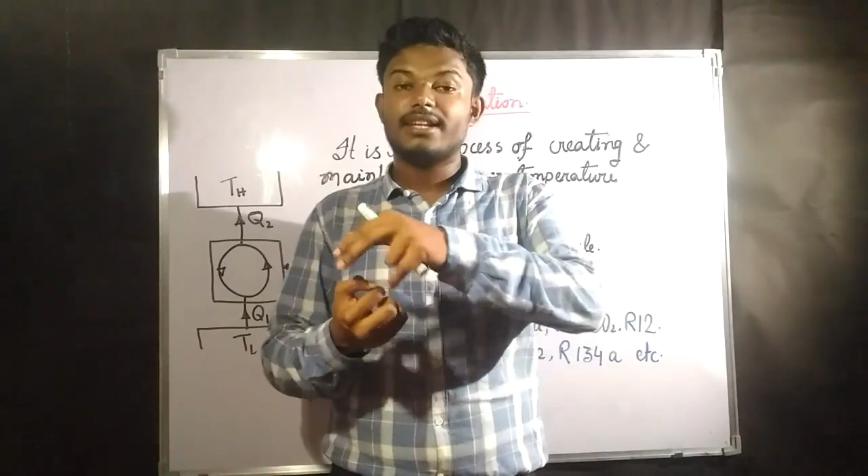Now what is refrigeration? Refrigeration is nothing but the process of creating a temperature which is lower than the surrounding temperature, and to maintain that temperature. This is known as refrigeration, or the process of refrigeration.

So if you imagine the refrigerator present in your room, the space covered by the refrigerator, if you open the door, you can feel the temperature inside is going to be very lower. That means the temperature inside that space, confined by its insulated covers, is maintaining a temperature which is lower than the atmospheric temperature.

So a refrigerator is having two purposes. One is to create the temperature lower than the atmospheric temperature, and the other purpose is to maintain the temperature. It's not like once you have created the temperature, it will continuously be there without any effort. It is not like that.

If it would have been the case, then you could have made ice out of water and kept it outside, and it would have been ice all day long. But this is not the case here.

Creating the ice out of the water is half of the work done by the refrigeration. We are creating the temperature lower than the atmospheric temperature, but to keep the ice intact, what do we need? We need to maintain the temperature lower than or at least equal to 0 degrees centigrade.

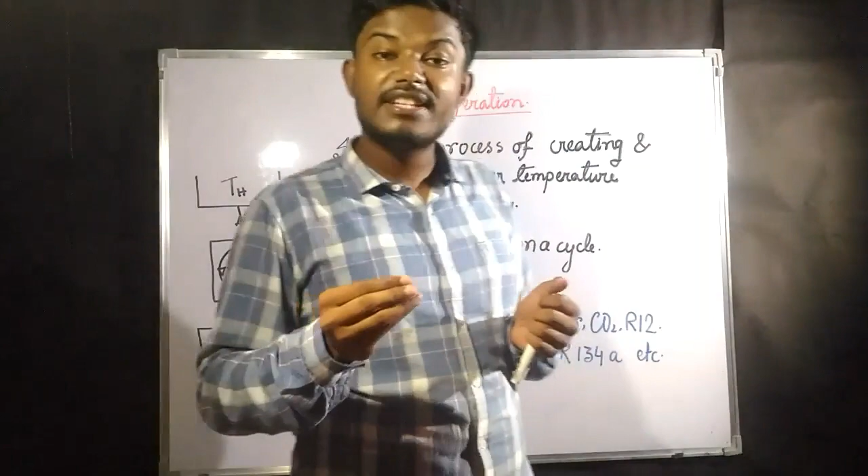Now why do we need to give work as input in case of refrigeration? Because in case of refrigeration, we are pulling out the heat from lower temperature and giving it to a higher temperature, but that is not a spontaneous case.

Okay, the spontaneous things are what? Which is done by nature. The natural things are known as the spontaneous things. Spontaneous thing means, without any effort, it is going to be happening. So if you think water is coming down through a hill, this is a spontaneous process. But water going up to a hill, that is not a spontaneous process.

We need to do some work to take water above a hill, so that it can go up to a certain height. But in natural or spontaneous cases, water automatically comes down. This means nature has a law: spontaneous work always takes place from higher potential to lower potential. In the case of water, it always flows from higher head to lower head.

Now, to reverse this process, we need to take water to a greater height or altitude. Imagine the overhead tank in your house, where water is given so you can use it for future purposes. So what is the procedure for water to reach the overhead tank?

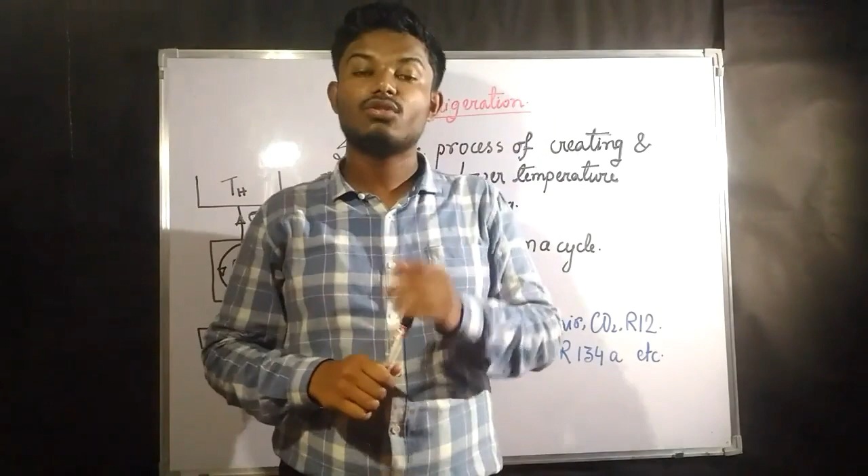You must use a pump. A pump is a work-consuming device, and we are going against nature. Generally water comes down, but we are trying to pull it up to a certain height, so some work has to be done, and that work is done by the pump. To pull water from lower altitude to higher altitude, we give work with the help of the pump. Without the pump, or without work being given to a system, you cannot reverse the spontaneous process.

Similarly, in refrigeration, heat always flows from higher temperature to lower temperature, which is the case in a heat engine. In a heat engine, we give heat and it goes to lower temperature from higher temperature. Now, the surrounding temperature is higher, and the space where we are trying to maintain a temperature lower than atmospheric is going to have a lower temperature.

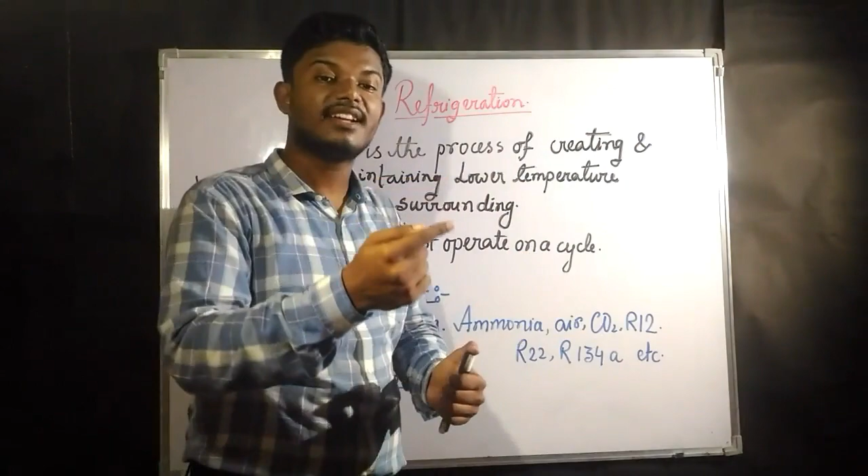If you put these two reservoirs side by side, heat from higher temperature will go to lower temperature. That means the space we are maintaining will gain heat due to the spontaneous action of nature. Now we need to reverse this: take heat out from the lower temperature and give it to a higher temperature, similar to taking water from lower altitude to higher altitude. Taking heat from lower temperature and giving it to higher temperature is against nature, so to go against nature, we need to give some work. That is why in refrigeration we give work so that heat goes from a lower temperature to a higher temperature.

To maintain this temperature, the system continuously runs on a cycle; without a cycle you cannot maintain this temperature. This is represented as an anti-clockwise cycle, because an anti-clockwise cycle always represents that it is power consuming. As refrigeration is power consuming, the cycle is anti-clockwise. This is the refrigeration concept.

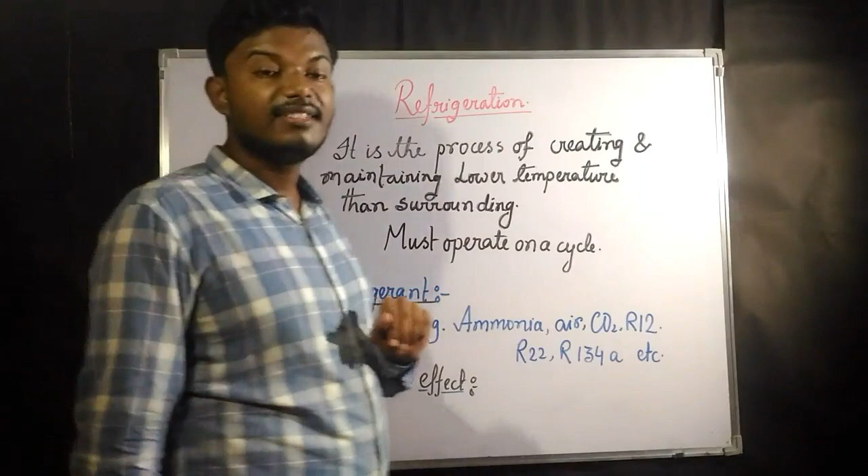Now coming to refrigerant: what is refrigerant? It is a substance with the help of which the creation of a temperature less than atmospheric temperature takes place. In some cases, it is a substance taken in such a way that it evaporates only at a temperature less than atmospheric temperature.

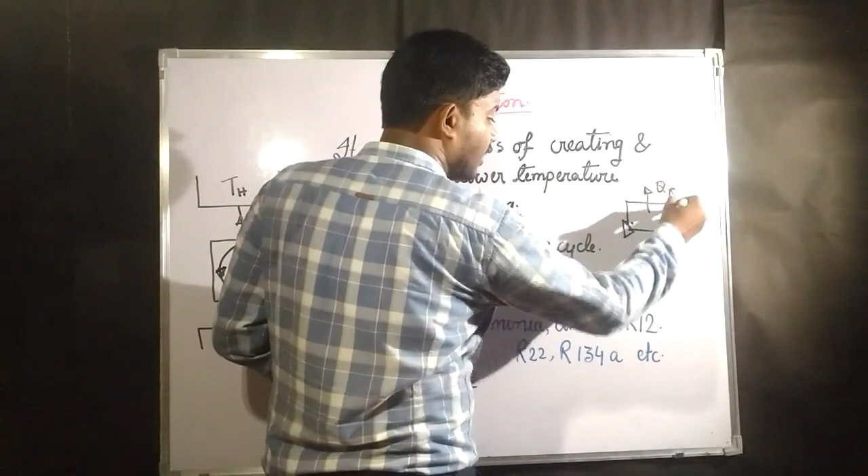Suppose there is a turbine, a compressor, a heat rejection system, and an evaporator. In the evaporator, all the liquid evaporates and perfect steam comes out. So this device is known as the evaporator.

Okay, so what does this refrigerant do? We take the refrigerant in such a way... we are taking a particular case. In particular case, that means we are just maintaining a temperature lower than the atmospheric temperature. We are not going to a particular temperature like minus 180 degrees centigrade. No, we are taking a particular condition that is keeping the temperature lower than atmospheric temperature. That is our motive, nothing else.

For this particular case we are going to explain this example. So what is going to be there? Suppose the substance is coming out in the evaporator, after expanding, this is a turbine. Sorry, we have drawn it in a different way. This is going to be a compressor and this is going to be a turbine. So that means, this is a turbine. So after expanding from the turbine,

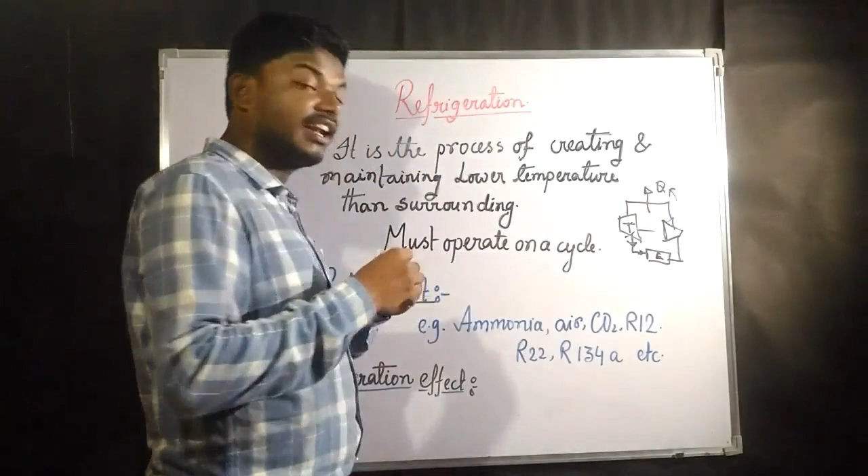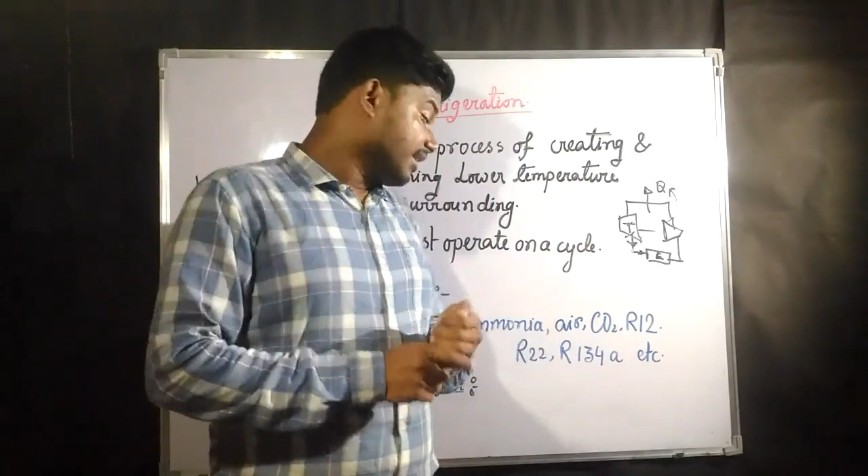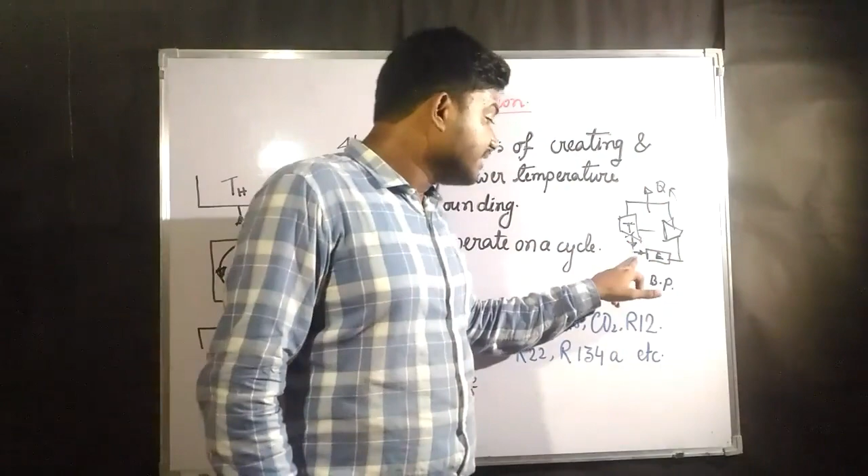always the liquid comes out. So liquid is now passing through the evaporator, and the substance is chosen in such a way that it has a boiling point temperature less than the atmospheric temperature. That means, suppose your surrounding temperature is 25 degrees centigrade. Now we will choose one of the refrigerants in such a way that its boiling point temperature is going to be, suppose, 10 degrees centigrade. At 10 degrees centigrade, automatically it evaporates or boils. Boils means the complete liquid is now converted to vapor. So the substance which we are going to use will automatically evaporate at 10 degrees centigrade only.

Now due to this evaporation, what will happen? During any phase change process, there is some latent heat involved. So during this evaporation process, it takes out the latent heat of evaporation. During phase change there is always some latent heat. So while it is evaporating in the evaporator, it is taking some latent heat of evaporation from the space where the evaporator is kept. From there it takes the latent heat of evaporation, and due to this, heat is continuously being rejected by the space where we are maintaining the temperature.

So after this evaporator, the vapor that comes out from the evaporator is passed through a compressor. After that, the heat is rejected, and after that it is again expanded through a turbine, and in this way the cycle works. So basically, refrigerant is what? Refrigerant is a substance which helps us to maintain the temperature, or to create a temperature lower than the atmospheric temperature, or a temperature which is required. So for this reason, refrigerant is used.

Now, refrigeration effect. What is refrigeration effect? Refrigeration effect is the amount of heat that is taken out from the space so that we can create the temperature we need. Suppose we need to create a temperature of 5 degrees centigrade, and it is presently in temperature equilibrium with the surrounding of, suppose, 27 degrees centigrade. Now, to take the temperature of that space from 27 degrees centigrade to 5 degrees centigrade, the amount of heat that has been taken out from that space is known as the refrigeration effect.

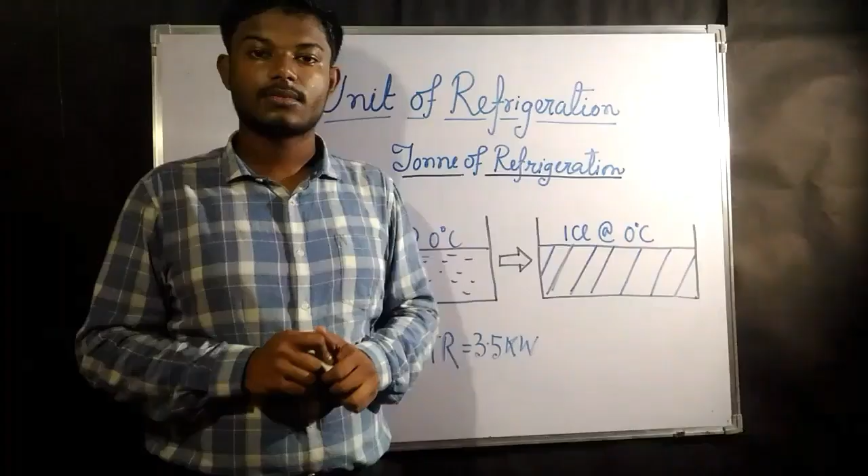So now we are going to study the units of refrigeration. The first thing is ton of refrigeration, which is a unit of refrigeration. Now what does 1 ton of refrigeration mean? 1 ton of refrigeration means the amount of heat that has to be taken out from 1 ton of water, that is 1000 kg of water, at 0 degrees centigrade, to convert that whole mass of water into ice at 0 degrees centigrade in a total of 24 hours. Then that amount of heat that has been taken out to convert the water to ice is known as 1 ton of refrigeration.

So suppose this is the container, and in this there is 1 ton of water, that is 1000 kg of water present here at 0 degrees centigrade. We need to take out the heat from this water so that the water at 0 degree becomes ice at 0 degree centigrade. So in 24 hours, the amount of heat that has to be taken out from this so that the complete water is converted to ice at 0 degree centigrade, then that amount of heat is known as 1 ton of refrigeration.

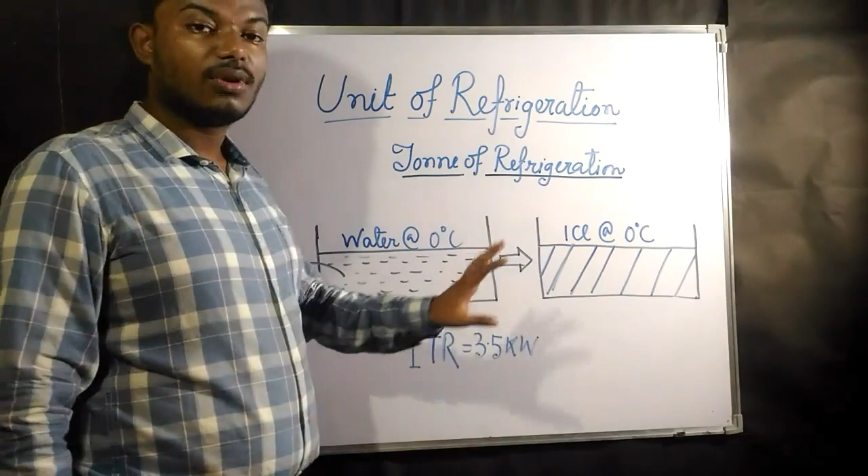Okay, so this is 1000 kg of water. This is known as 1 ton of refrigeration, and 1 ton of refrigeration is equivalent to 3.5 kilowatt. So anywhere it is given that 1 ton of refrigeration, for converting or taking out 1 ton of refrigeration, you can blindly use 3.5 kilowatt in place of 1 ton of refrigeration.

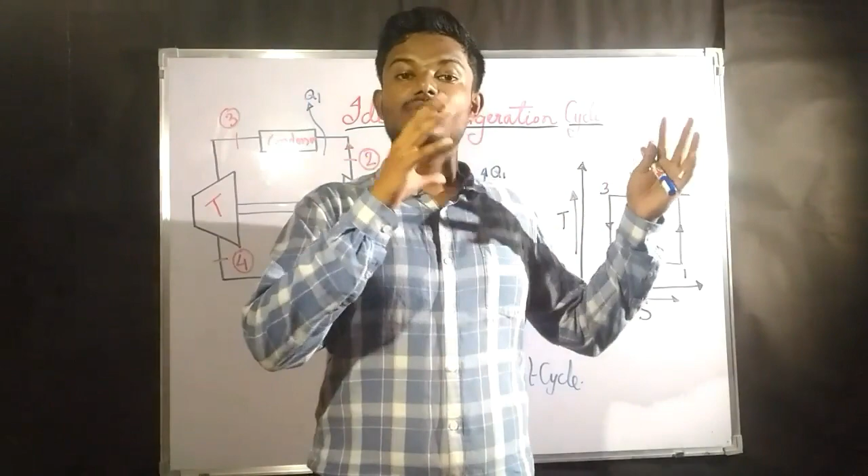Now before starting the refrigeration cycles, we know that before starting any cycle we need one idealized cycle through which we can compare other real cycles. This ideal cycle is our theoretical reference, and for comparison with it we have different real cycles. Real cycle means the cycle on which the refrigeration, steam power plant, or air standard power cycle actually operates, such as the Brayton cycle, Otto cycle, Diesel cycle, or Rankine cycle.

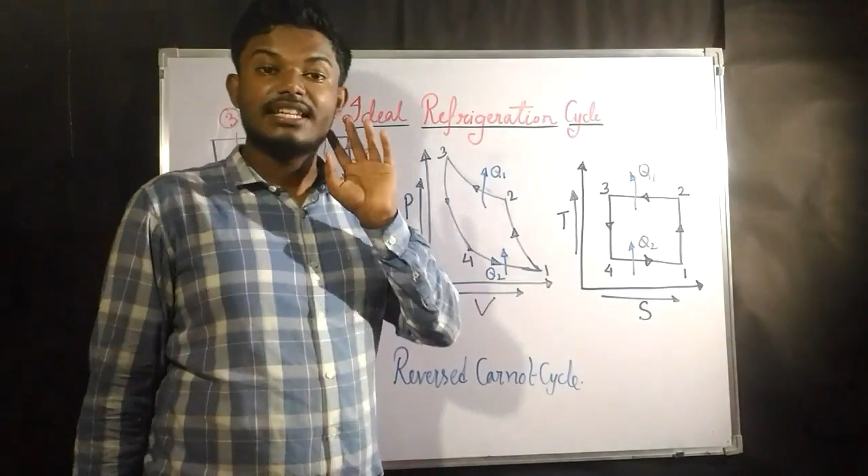But for every cycle, for the reference of efficiencies, we need one ideal cycle, and that ideal cycle for each and every process or plant is going to be the Carnot cycle only. In the steam power plant we have also used the Carnot cycle. In refrigeration also, the main ideal refrigeration cycle is nothing but the reverse Carnot cycle.

Now why is it reversed? The Carnot cycle is generally in clockwise direction. If we reverse that same Carnot cycle, we get the phenomenon of refrigeration. Reverse this cycle means what? Previously it was in clockwise direction, now it is going to be in anti-clockwise direction.

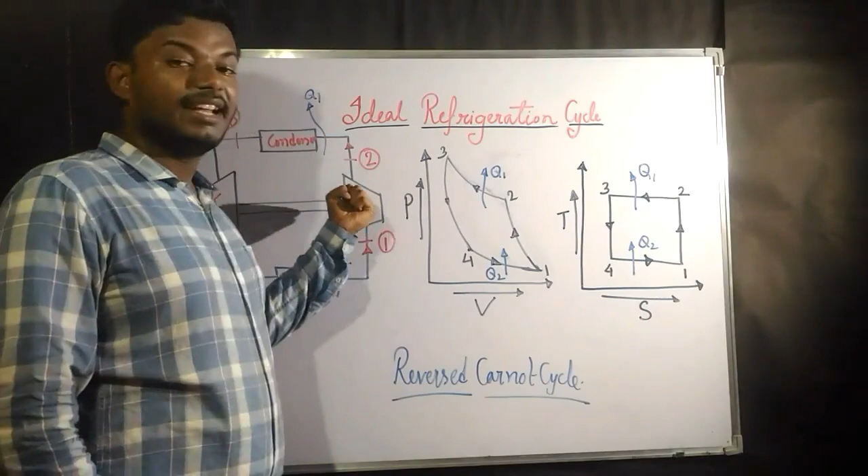So as I told on the last board, whatever product comes out from the evaporator is now compressed. By compressing it, its pressure increases, and temperature also increases. After that it is passed through a condenser. Condenser means it is one of the heat rejection processes, so in the condenser the heat rejection process takes place.

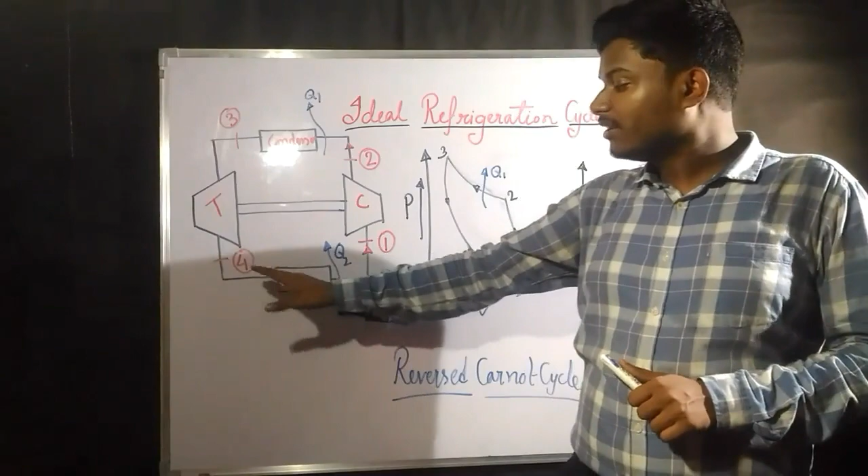So after that, whatever product remains is expanded through the turbine. After expansion, the cooled thing loses its enthalpy also, meaning it loses its heat content. So after losing the heat content, the thing coming out would now be cooled down, and that cold thing will again pass through the evaporator.

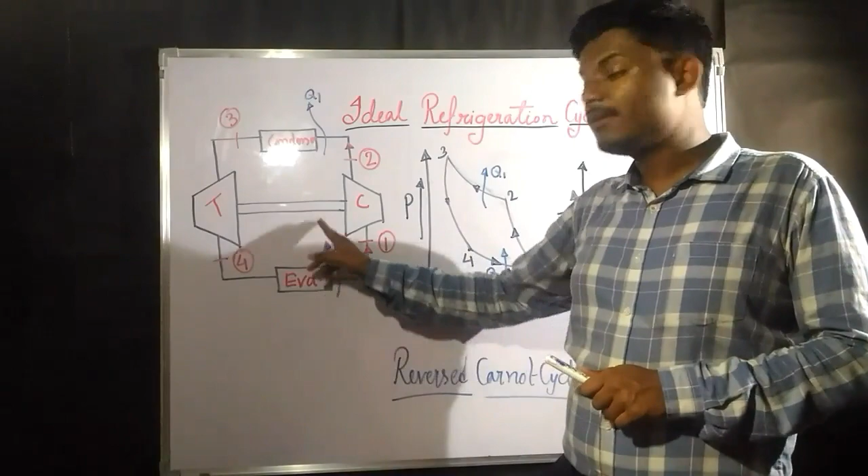In the evaporator there is continuous phase change, and due to this evaporation, this amount of heat Q2, or the refrigeration effect, is absorbed. Refrigeration effect means the amount of heat taken out from the space so that we can maintain a temperature lower than the atmospheric temperature. So due to this evaporation, this Q2 amount of heat goes out as latent heat from the space where we need to maintain the temperature.

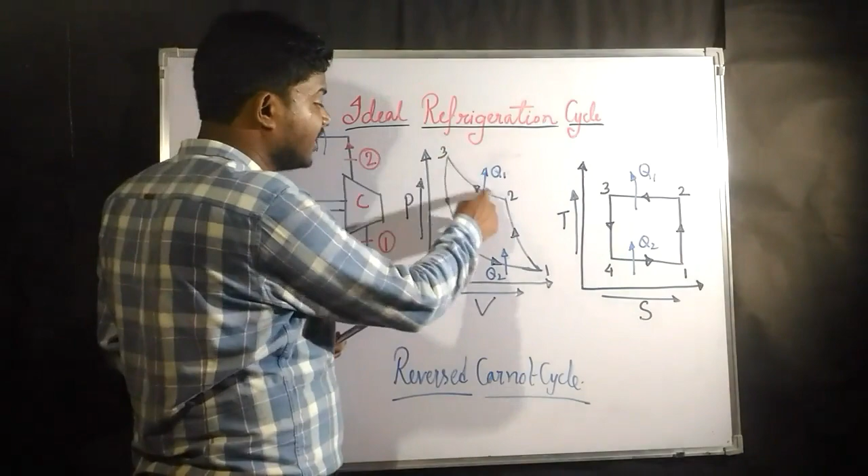So this is the PV diagram, and this is the temperature-entropy diagram for the reverse Carnot cycle. Previously the Carnot cycle used to start from here: adiabatic compression, then isothermal heat addition, then adiabatic expansion, then isothermal heat rejection. Now in this refrigeration cycle, this is going to be completely reversed.

Now it will start from here: 1 to 2 is adiabatic compression. 2 to 3 is isothermal heat rejection — in the Carnot cycle the heat input process was isothermal, but now the heat rejection process is isothermal. Again 3 to 4 is expansion in the turbine.

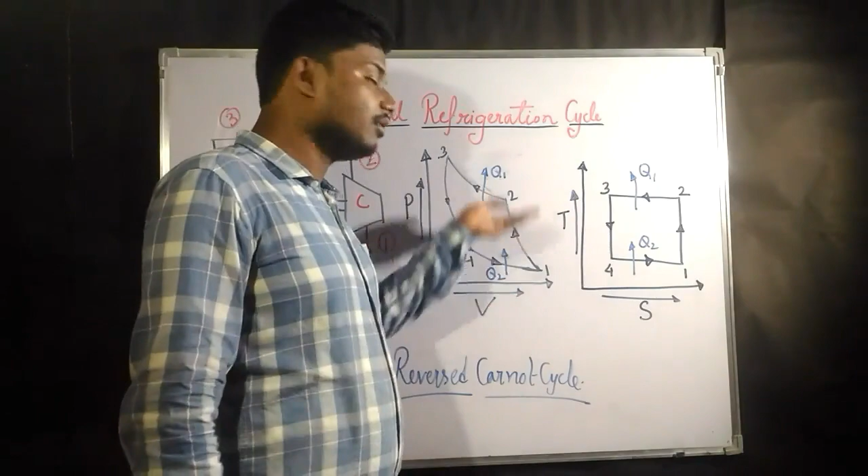After that, heat input to the system is from 4 to 1. Similarly, in the temperature-entropy diagram, 1 to 2 is reversible adiabatic, meaning isentropic, so it is parallel to the T axis. 2 to 3 is an isothermal process, so it is again parallel to the entropy axis.

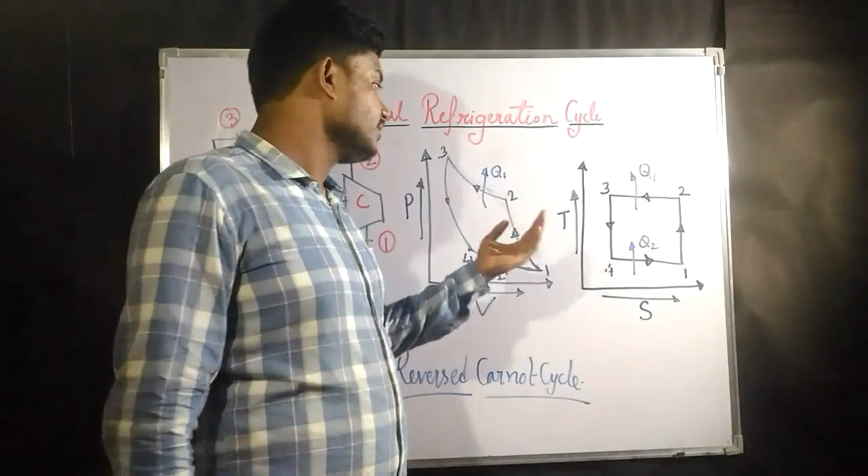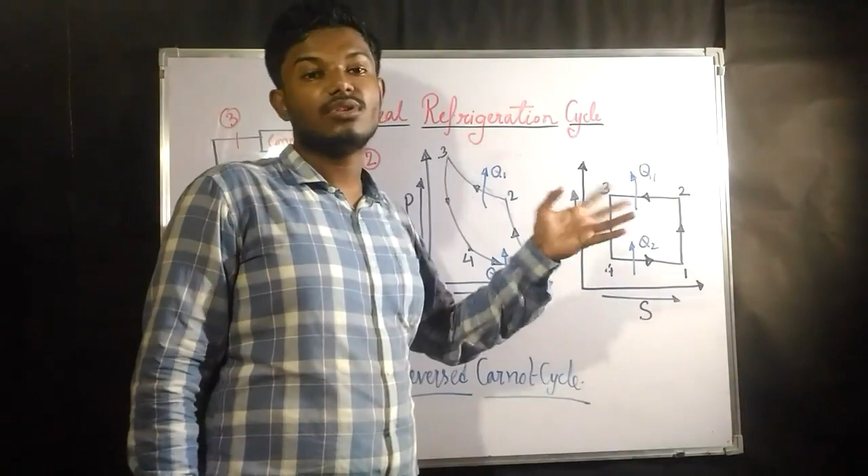3 to 4 is again an isentropic process, or adiabatic expansion process, so it is going to be parallel to the T axis. And the final thing is 4 to 1, that is heat addition to the system, or you can say the heat that has been added to the system, or taken out from the space where you need to maintain a temperature. So 4 to 1 is nothing but heat input to the system. So this is going to be our ideal cycle, that is the reverse Carnot cycle.

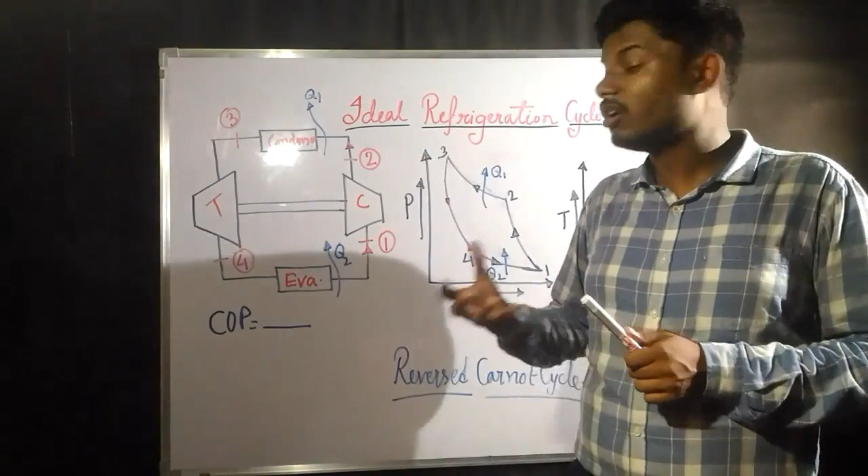Now if you want to find out the COP, what is COP? COP is the amount of heat - the concept of COP has also been discussed in the second law. So what is COP? COP is nothing but the amount of heat that is the required effect. So what is the effect we require now?

The thing we need to know is what is the amount of heat that is taken out from the space. So this is going to be nothing but the refrigeration effect, or you can write Q2. And what is going to be the input? The input is nothing but whatever work input you are going to give with the help of this compressor, which is going to be in the denominator. So this ratio is going to give you the COP.

Now we have again seen that the COP - let us write again what is going to be COP? COP is nothing but refrigeration effect divided by the work input.

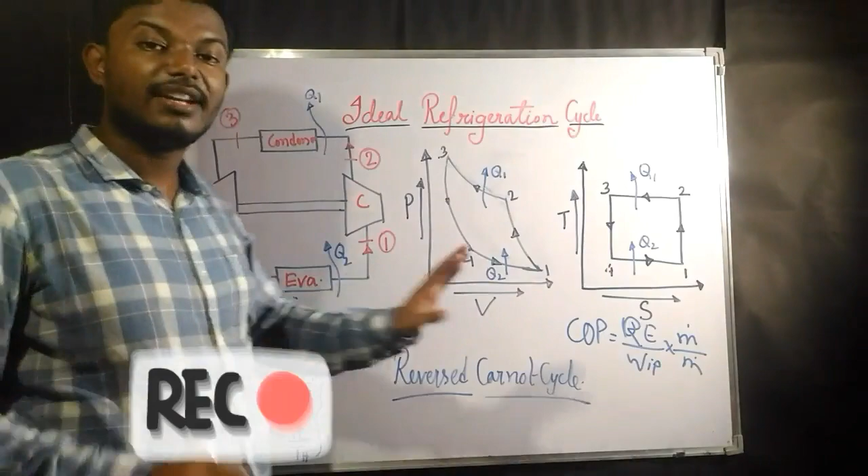Now here you can write mass flow rate by mass flow rate. Mass flow rate is what? It is the mass flow rate of the substance, or the refrigerant, which is continuously moving in a cycle to make the process of refrigeration work. So the mass flow rate of that substance is going to be m dot, and we can write m dot by m dot.

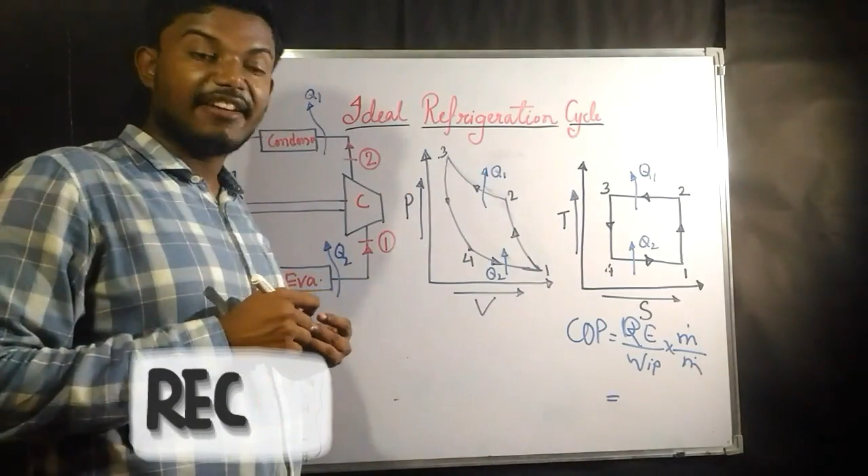So Re is what? Re is the refrigeration effect. If you multiply Re with the mass flow rate, it is going to give you the refrigeration capacity. Now this is going to be COP. So Re into m dot gives you the refrigeration capacity.

And we have told earlier also that work input into mass flow rate is nothing but power input. So you can also find it out like this: COP is RC divided by power input, that is going to give you the coefficient of performance.

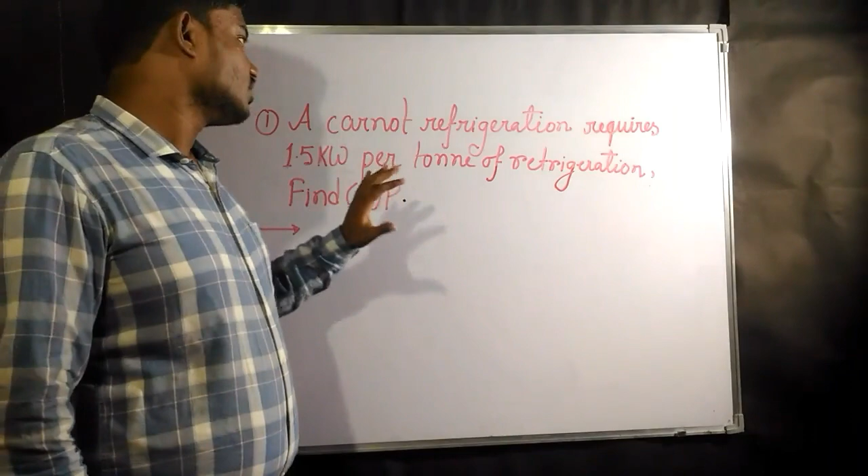Now let us see a question. The question goes like this: a Carnot refrigerator requires 1.5 kilowatt per ton of refrigeration, find the COP. That means they have a Carnot engine, a reverse Carnot engine - a Carnot refrigerator which requires 1.5 kilowatt power.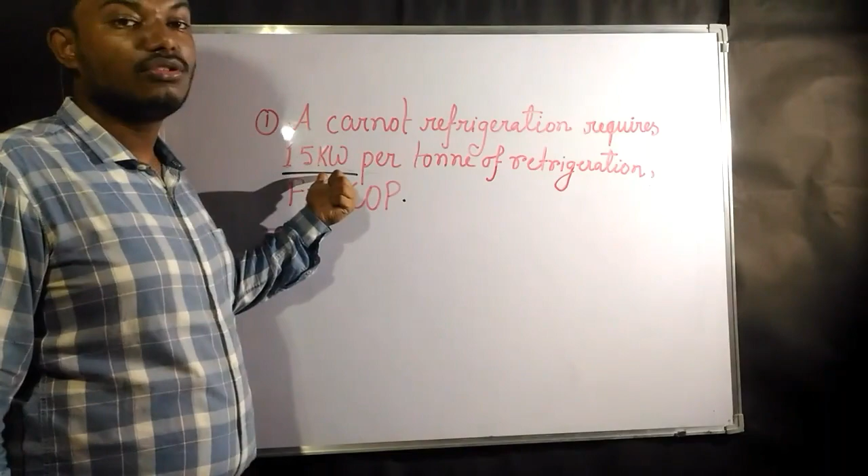So in Carnot, in any refrigeration, the energy is given to a system in terms of work. So the Carnot refrigeration requires 1.5 kilowatt per ton of refrigeration, meaning this is the amount of work we need to give. Per ton of refrigeration means to take out 1 ton of refrigeration from the space where we need to maintain a temperature lower than the said temperature. So this is the amount of heat we need to take out, and this is going to be the amount of work we need to give into a Carnot engine, so that we can find out the COP.

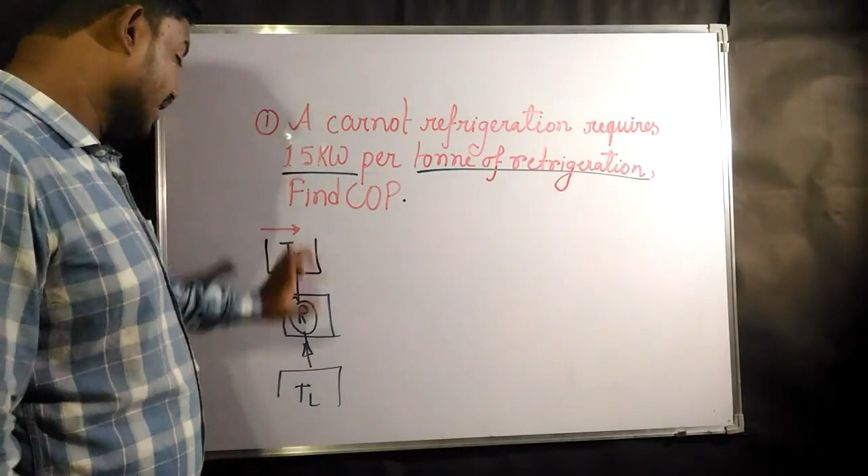Now this is a Carnot refrigeration, but in Carnot refrigeration there are different parts: compressor, turbine, condenser, evaporator - everything is given. But from this question we are not getting details on any particular machine part, so we need not consider the PV diagram or TS diagram or the complete cycle diagram. We can easily do it from this simple layout only. This is going to be refrigeration, this is going to be higher temperature, and this is going to be lower temperature, from where we need to take out 1 ton of refrigeration, because they have given that per ton 1.5 kilowatt is required. Now this is going to be the layout, so this heat is going to be QH.

The amount of heat transferred to the reservoir with higher temperature is QH, and we need to find that out. QL is nothing but the amount of heat we need to take out from the lower temperature reservoir.

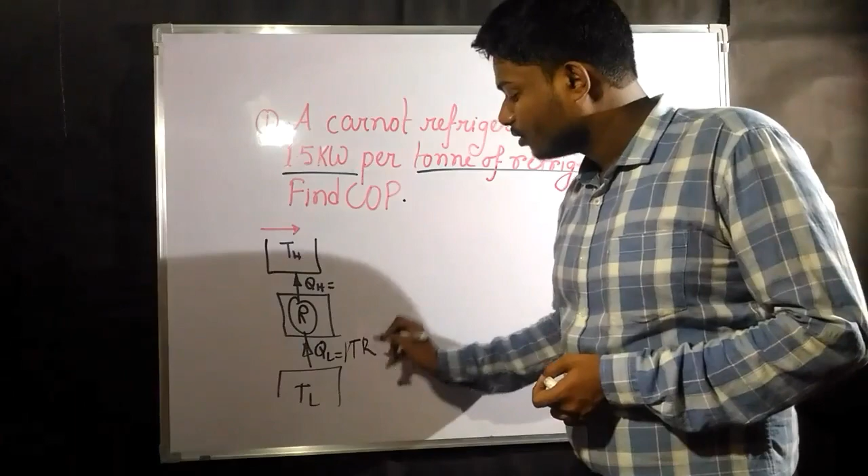That is given as 1 TR, meaning 1 ton of refrigeration, which is 3.5 kilowatt, as we said on the last board, and it requires a work of 1.5 kilowatt.

Now, to find out the COP: COP is nothing but the required effect divided by the amount of energy we are giving in as input, that is, the work input.

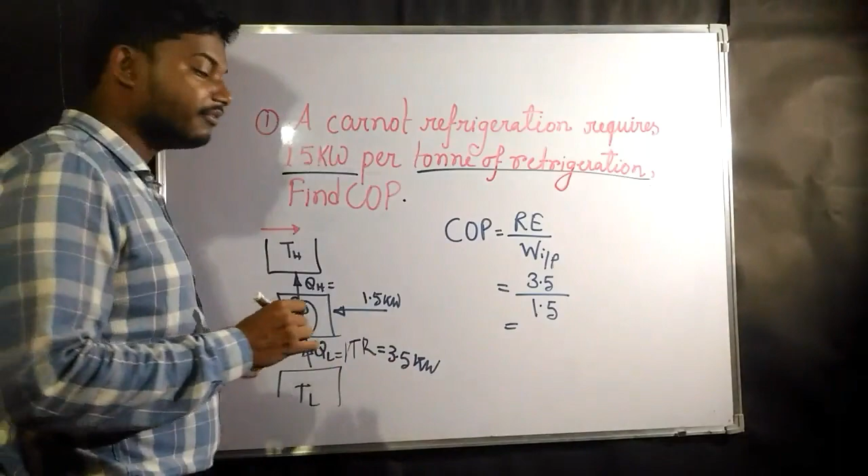So what is the required effect here? The amount of heat that has to be taken out is 3.5, and the work input is 1.5 kilowatt. So 3.5 by 1.5, this is going to be 2.33. This is a very basic thing for finding out the COP.

So this is going to be the layout from which we need to find out the different energy inputs and outputs through the first law of thermodynamics for a cycle, and after that, if you get the required values, you can easily find out the COP of the refrigeration. Now let us see another question.

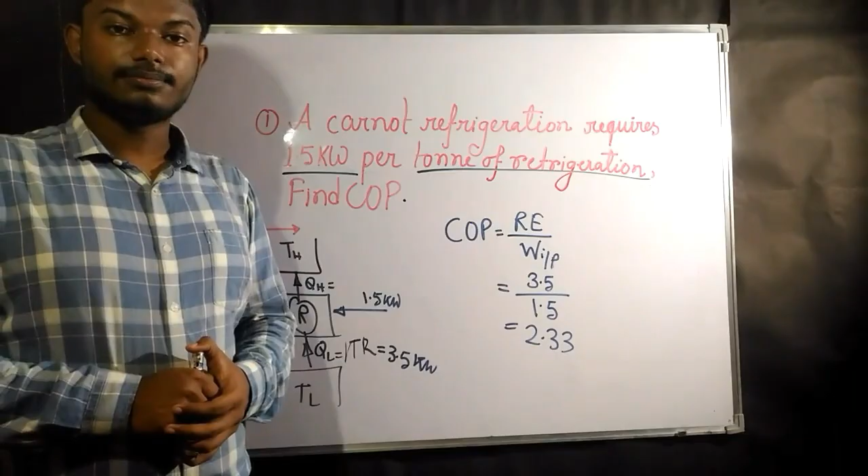The question reads like this: a refrigeration works in temperature limits of minus 30 degrees centigrade and 32 degrees centigrade. The actual COP of the refrigeration is 0.75 times the maximum COP. Find the power input for an RC, meaning refrigeration capacity of 5 kilowatt.

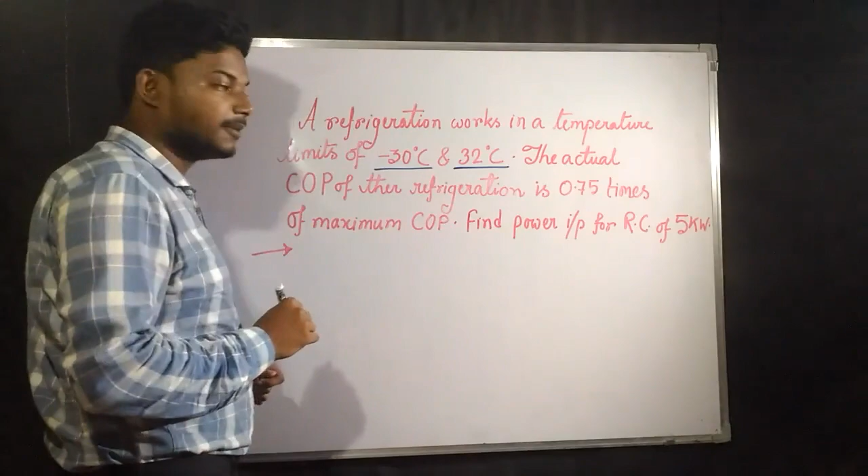So they have given us the temperature limits: this is going to be the lower temperature limit, and this is going to be the higher temperature limit. A refrigeration capacity of 5 kilowatt is given, and it is also mentioned that the actual COP of the refrigeration is going to be 0.75 times the maximum COP. So this is the complete question.

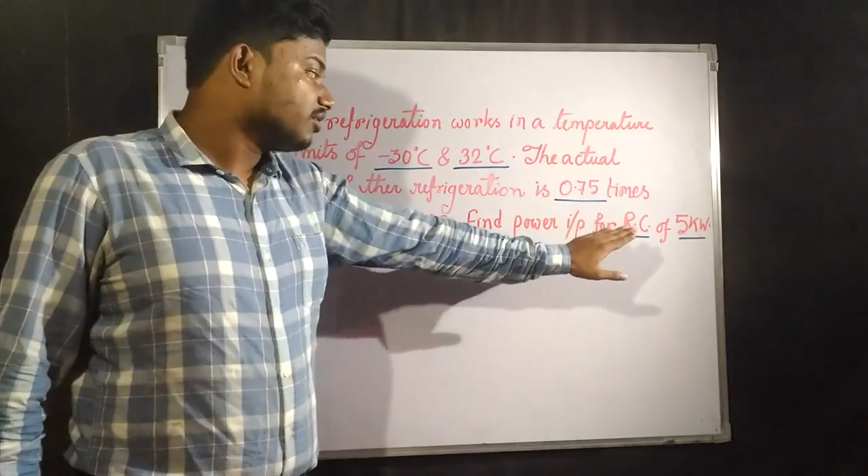That means there are two temperature limits, and a refrigeration capacity of 5 kilowatt. For that, what is going to be the power input? That is what we require to find out.

But they have also given the condition that whatever the system it is working on, it is obviously going to be 0.75 times of the maximum COP.

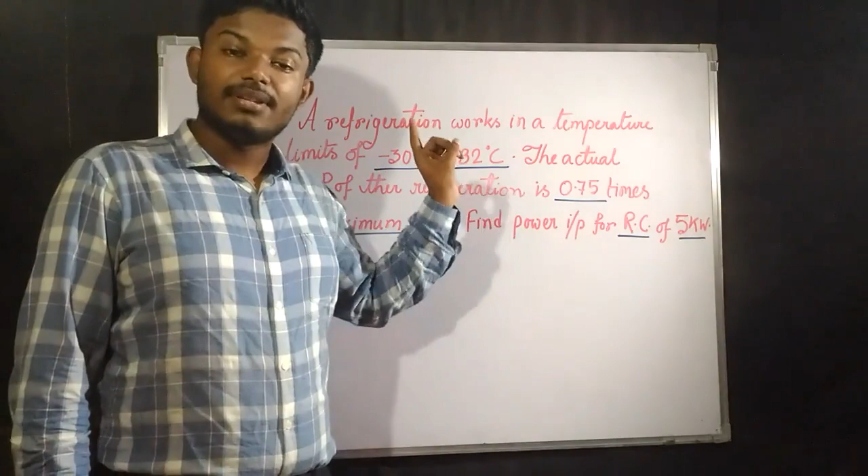Now this refrigeration is running on a cycle, but what cycle they did not mention. It could be Carnot cycle, reverse Carnot cycle, reverse Brayton cycle, any cycle. But we also know that the maximum efficiency and the maximum coefficient of performance is only given by one ideal cycle, that is the Carnot cycle.

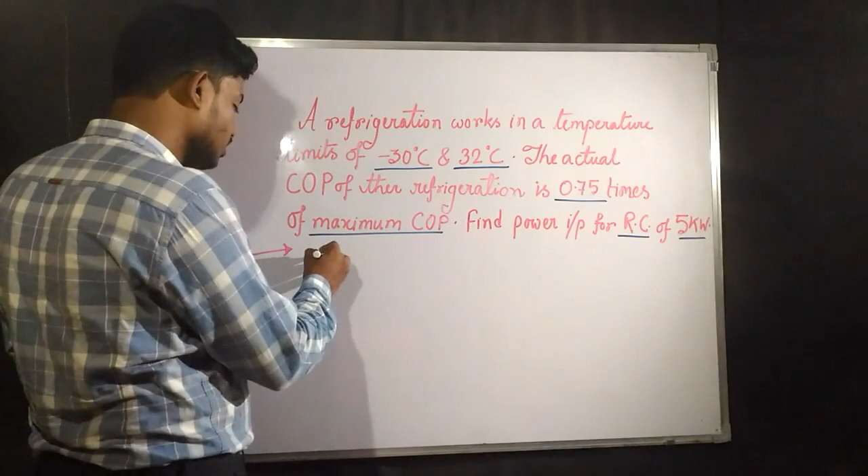Carnot cycle gives the maximum efficiency, and similarly, reverse Carnot cycle gives the maximum coefficient of performance, or maximum COP. So if you consider a reverse Carnot cycle, we know that COP of refrigeration is nothing but QL divided by QH minus QL. This is the formula of refrigeration.

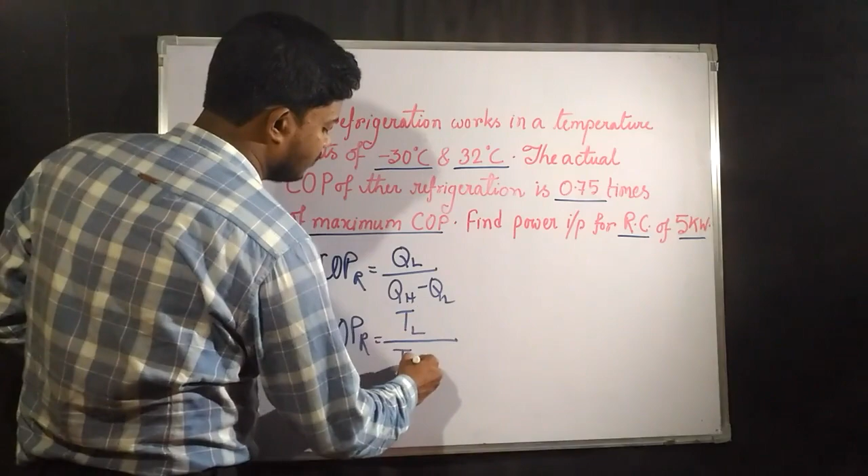But while finding the Carnot refrigeration, we have replaced this Q term with a temperature term, and this is going to give us the maximum COP. Why? Because we know that if efficiency or coefficient of performance is given in terms of heat exchange, and if we replace these terms by the corresponding temperature of those thermal reservoirs, then this gives us the thermal efficiency or thermal coefficient of performance.

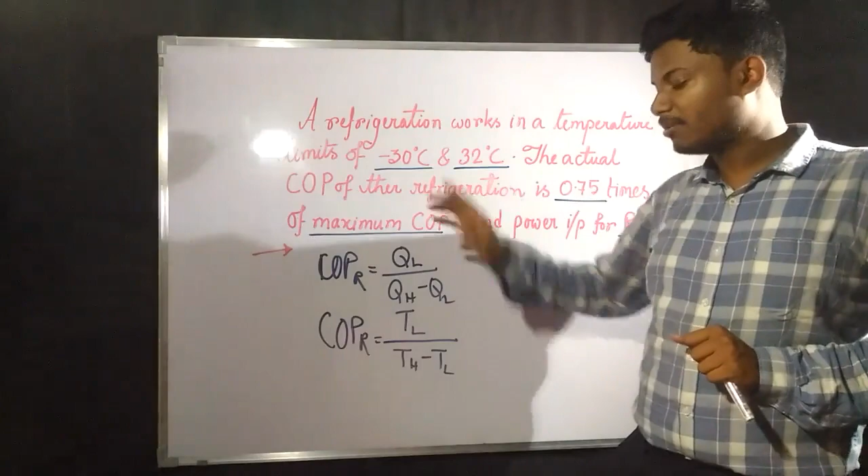Now we require to find the maximum coefficient of performance, so replacing the heat exchange at the lower thermal reservoir with the corresponding temperature of that thermal reservoir will give us the coefficient of performance for the reverse Carnot cycle, which gives us the maximum COP. They have clearly mentioned what the actual COP is, so now let us find out what our actual COP is going to be.

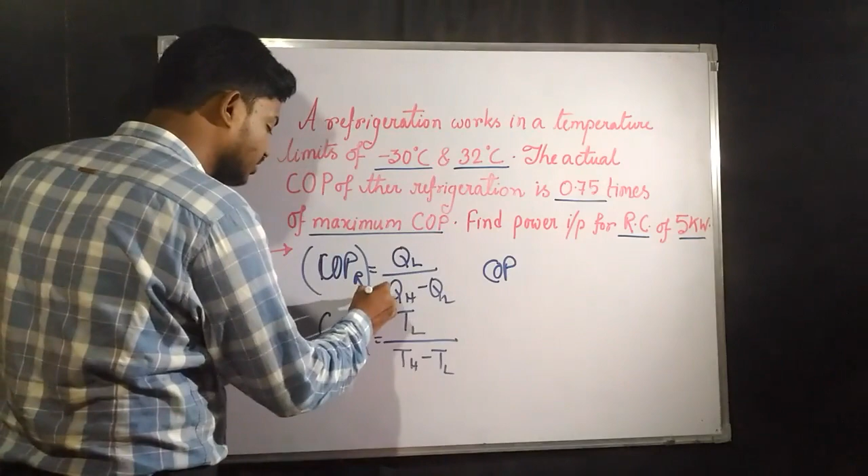Okay, this is for Carnot cycle. This is going to be your maximum Carnot cycle, or sorry, maximum coefficient of performance. Okay, so they have given that

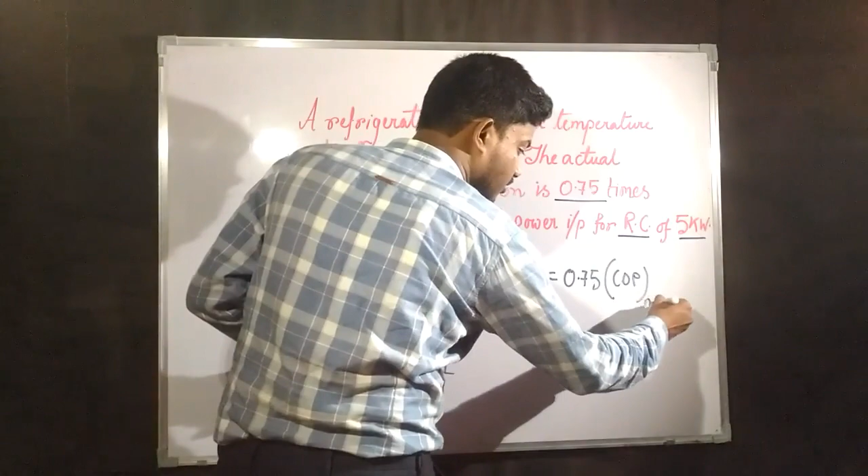actual COP is going to be 0.75, or 75% of maximum COP. Now, what is going to be the actual COP? We found out earlier that actual COP is nothing but refrigeration capacity divided by power input, or refrigeration effect by W net, or W input.

So if we multiply mass flow rate with both the terms in numerator and denominator, then this will be the case: RC, or refrigeration capacity, divided by power input, equal to 0.75

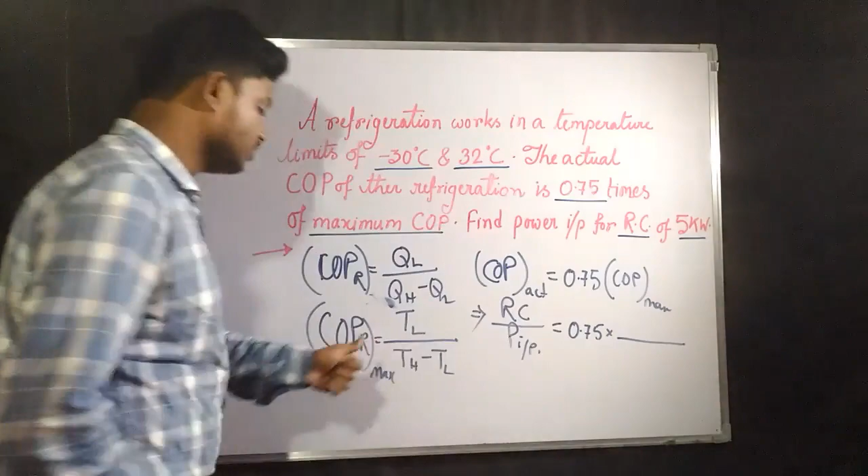into this one. Now these temperatures, TL divided by TH minus TL, are in absolute temperatures, but these are given in degree centigrade. Absolute temperature means we need to find them in terms of Kelvin, the unit must be Kelvin. So find the temperatures in Kelvin.

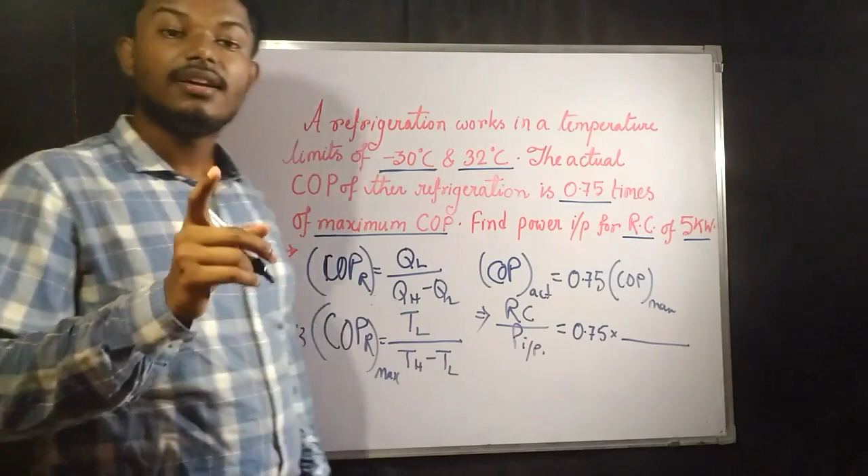If you want to find out the lower temperature, this is given as minus 30 degree centigrade. So if you add 273 with it, it is going to give you the actual absolute temperature in Kelvin. So if you do minus 30 plus 273, it is going to be 243 Kelvin. So this will be the lower temperature in absolute scale.

Now if you want to find the higher temperature, same procedure, you need to add the 32 degrees given, plus 273. So the amount you are going to find out is nothing but 305 Kelvin. 305 Kelvin is going to be your higher temperature.

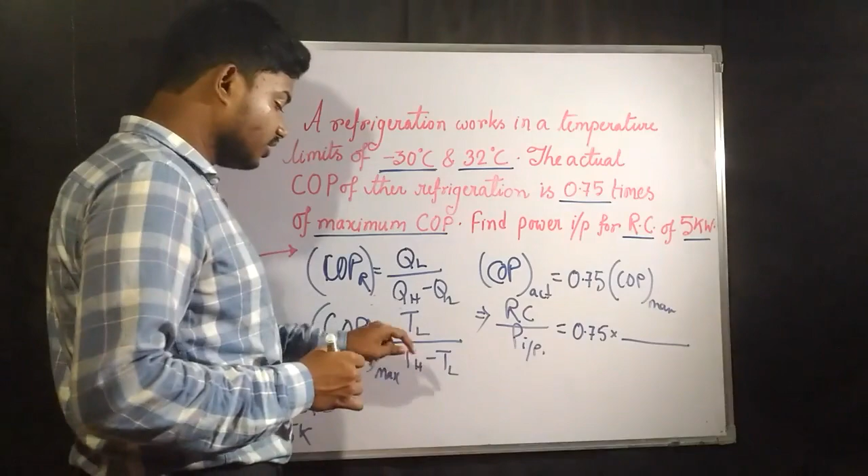Now put these values in the equation. So in place of this, COP max will come here. In the numerator it is TL. TL is 243. Now TH minus TL. TH given is 305 Kelvin. So 305 minus 243.

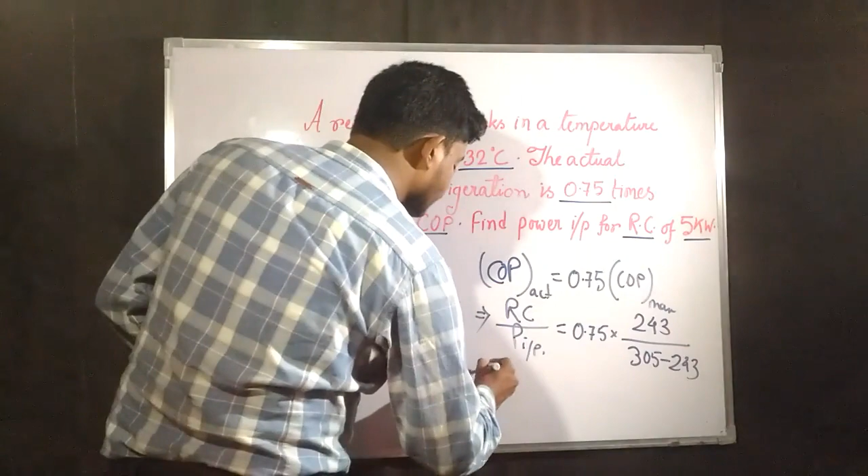So if you do this, the result, and this RC, refrigeration capacity, is given as 5 kilowatt, so in place of refrigeration capacity I am writing 5. RC equal to 5 kilowatt. So what is going to be the power input? The power input is going to be 1.7 kilowatt.

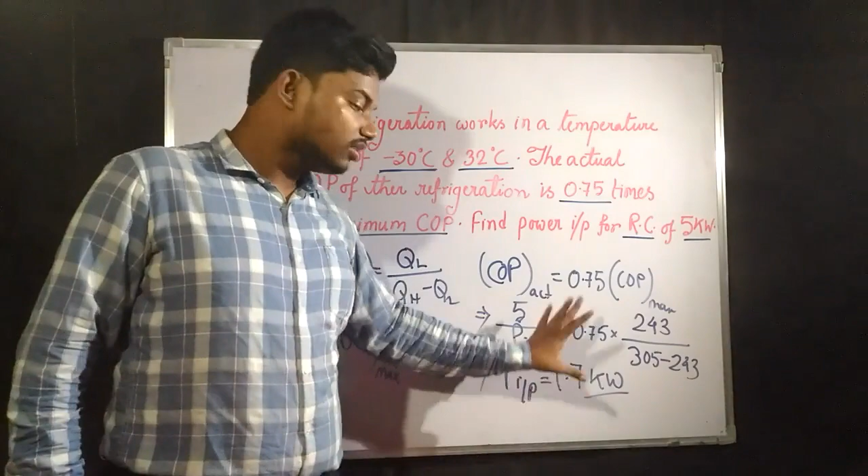The power input you can find out from here, this would be 1.7 kilowatt. These calculations have been previously done, so if I calculate here it would take a longer time, so I have directly written down the result. If you simplify this equation, you will get that power input from this question is going to be 1.7 kilowatt. Likewise, reverse Carnot cycle, we have reverse Brayton cycle also.

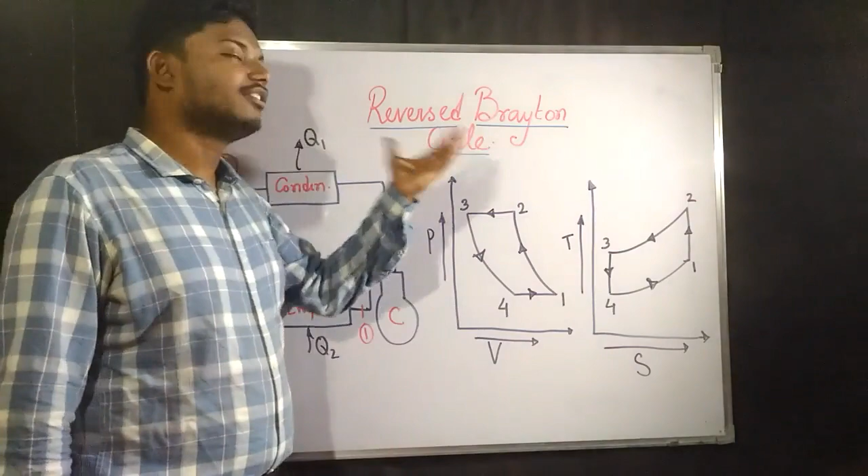So if you remember, in the Brayton cycle, it was a power producing cycle. Now if you reverse all the processes in that cycle, you are going to get a refrigerator. So that refrigeration is going to be working on the basis of reverse Brayton cycle.

So previously it used to start from here, and the compressor used to be there. After that, there used to be heat addition, and condenser used to be there. Condenser used to be here. Now we are reversing this process. Now it is starting from the compressor.

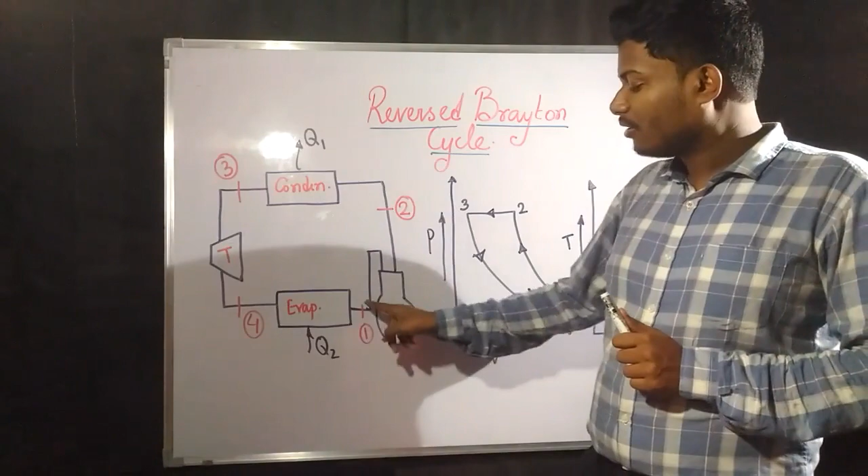If you look at the PV diagram and TS diagram also, previously the Brayton cycle used to start from this point, so after completing a cycle in clockwise direction, it used to come here. Now it has started from here. From the compression, it has started, 1 to 2 is going to be adiabatic compression. Similarly in the TS diagram, or temperature entropy diagram, 1 to 2 is nothing but adiabatic, or reversible adiabatic, or isentropic compression. Then after, 2 to 3 is what?

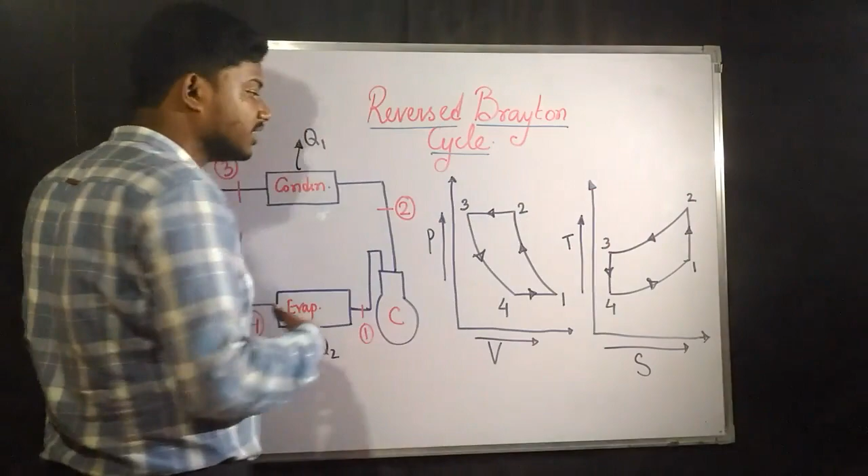This is heat rejection. It is coming down. If the arrow was in this direction, then it would have been heat addition, because temperature would have increased. Now from 2 to 3, temperature is decreasing, from this temperature line. So this is going to be heat rejection. Similarly, 2 to 3, this is going to reject heat in constant pressure condition. So this is constant pressure line in TS diagram, this is constant pressure line in PV diagram. So in constant pressure it is going to reject heat.

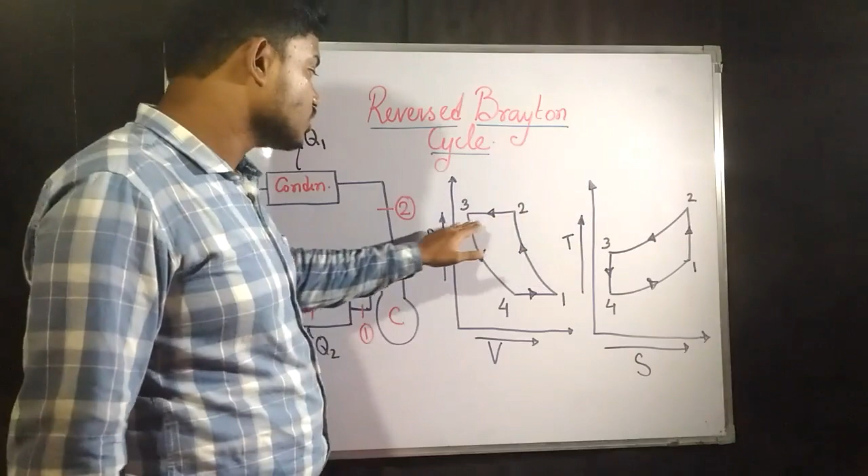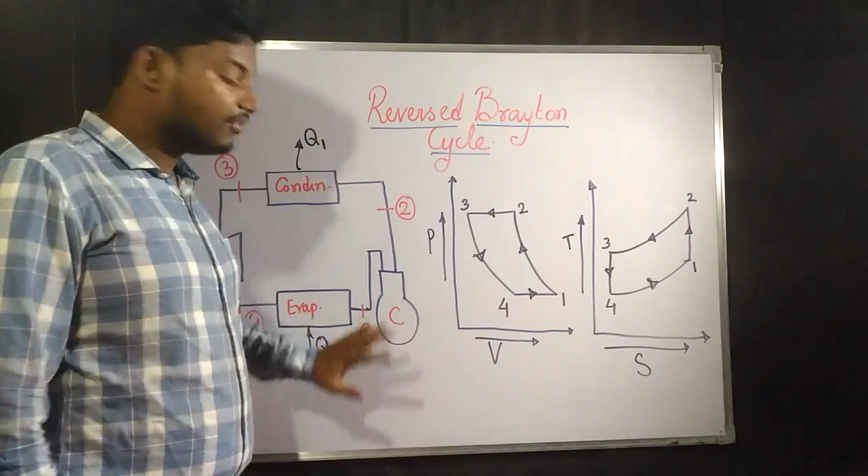Then after, 3 to 4 it is going to expand. After expansion, whatever the substance that is coming out will be in liquid form. Then in the evaporator it is going to get evaporated again, resulting in taking away some heat from the storage where we need to keep a temperature less than the required temperature. So from here the heat is going to get absorbed.

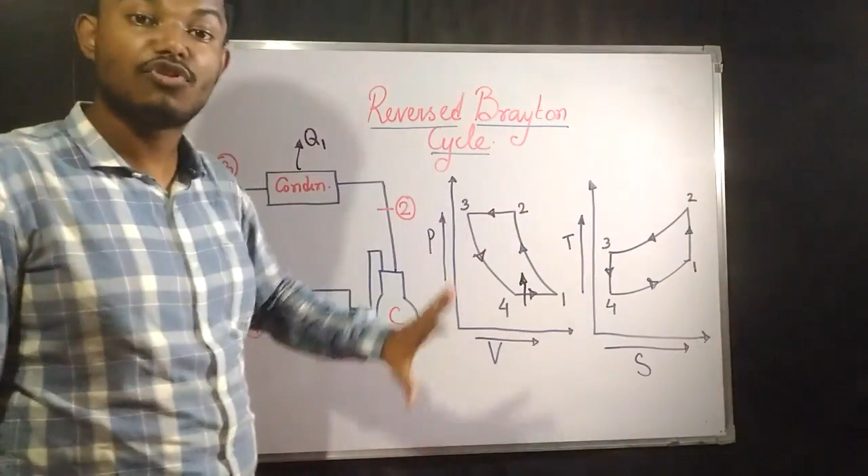From this region the heat is going up into the system, and it is going to get rejected via process 2 to 3. Similarly, in the TS diagram, 4 to 1 is going to be heat addition to the system from the storage. This is the system.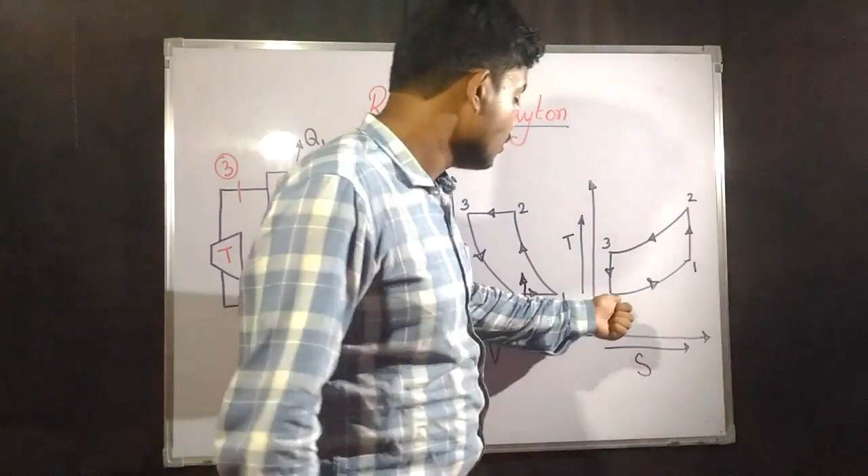So this is going to be our reversed Brayton cycle. Now if you want to find out the COP, it would be the same as before. Whatever work input you give goes in the denominator, and whatever the refrigeration effect is, that is the amount of Q2, the amount of heat taken away from the space, is going to be the refrigeration effect. So this will be the COP.

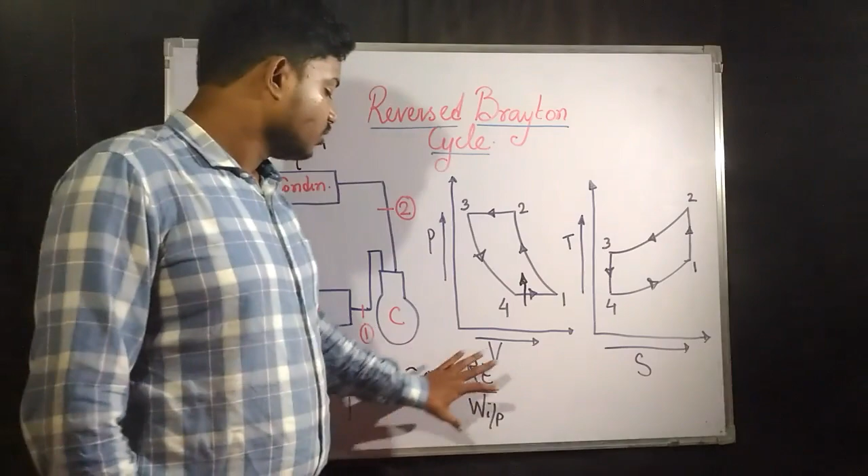In the Carnot cycle, you could have written the coefficient of performance in terms of temperature also, because writing it in terms of temperature gives you the maximum COP. But since this is the Brayton cycle, not the Carnot cycle, the temperature term in COP is not going to be there. Rather, you write it in heat exchange form, that means QL divided by QH minus QL.

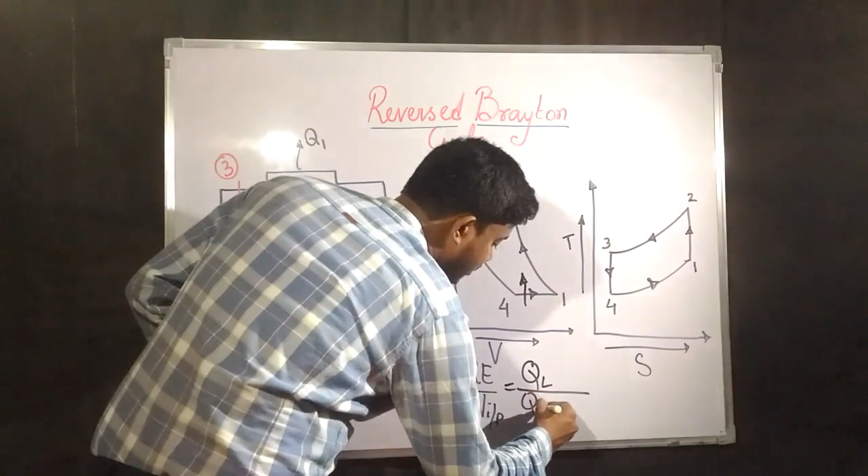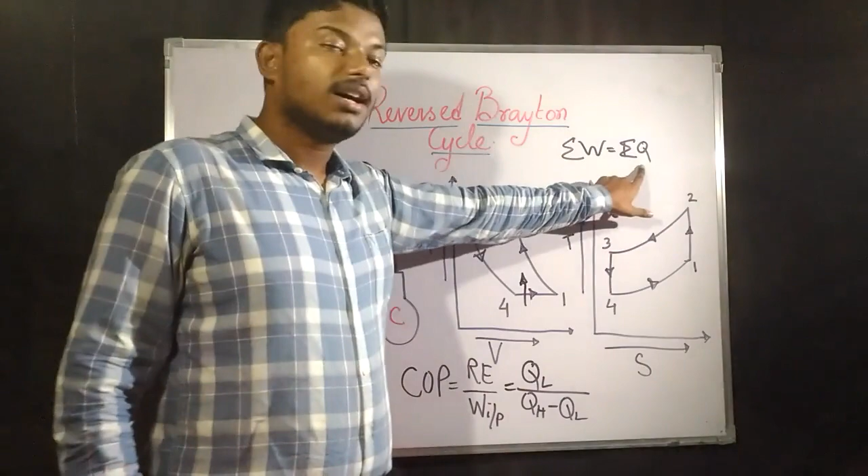Now if you want to know where this has come from: the work input W is nothing but equal to this, which comes from the first law for a cycle. First law for a cycle: work interaction is equal to total heat interaction. So from this equation, you find work input is going to be QH minus QL.

And refrigeration effect means whatever amount of heat has been taken out from the lower temperature, that is nothing but QL, and it is also known as the refrigeration effect. So this is going to be our COP for the reversed Brayton cycle.

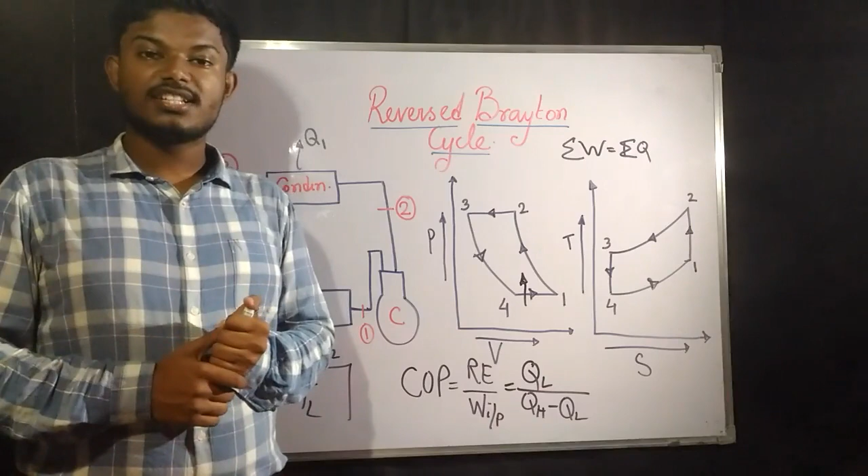Now we are going to start with the vapor compression refrigeration system, known as VCRS. In VCRS the procedure is going to be completely the same, but there is one difference: this is going to be vapor compression.

So unlike the other cycles, there is going to be a phase changing process. Whatever working fluid has been traveling throughout the machine parts, like the compressor, condenser, evaporator, and the expanding device, this working fluid is changing phase now.

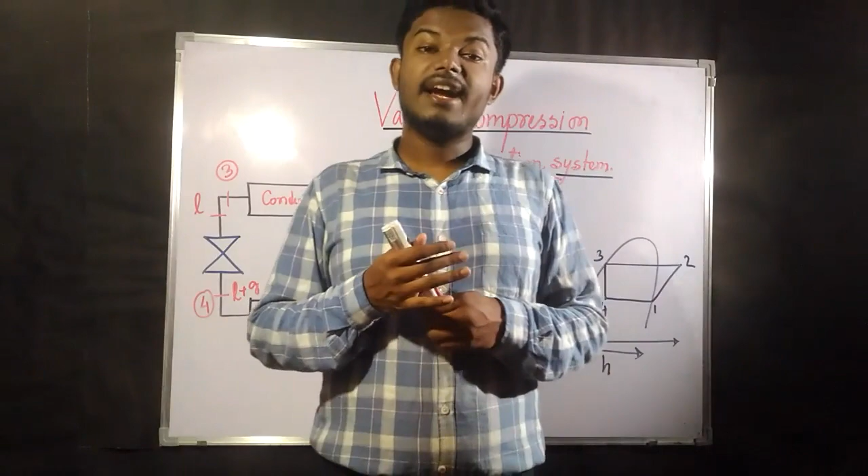And the other thing different from the Brayton cycle and Carnot cycle is that in both those cases, the expanding device was a turbine. The expanding device, whatever device was expanding the substance coming out from the condenser, was a turbine.

Now in the vapor compression refrigeration system, this is going to be a throttling device. So we are replacing the turbine with a throttling device, and the different parts are going to be the same now.

Now from 1 to 2, that means compression. So whatever substance comes out from the evaporator is going to be gaseous. Evaporator means it is going to evaporate whatever liquid enters into this evaporator.

This evaporator is going to turn it into vapor. So after vapor has been formed, this vapor is compressed through a compressor. After that it is passed through a condenser.

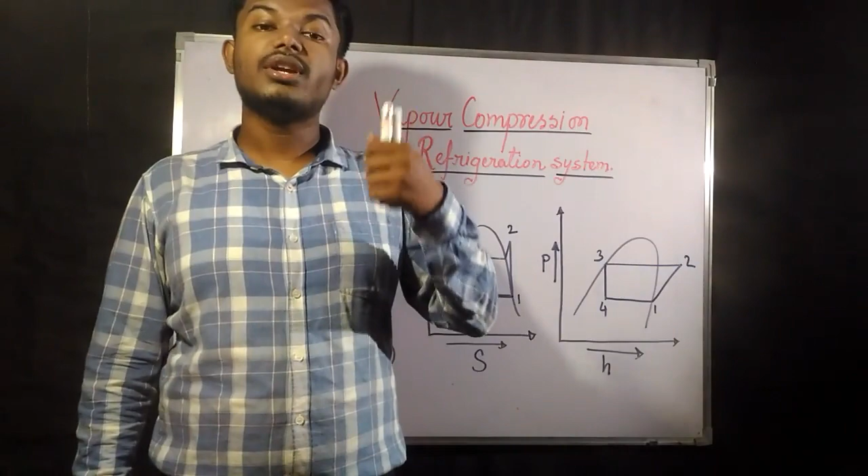Condenser is again a phase changing device, which is going to change the phase of the system from gaseous to liquid. So whatever compressed gas has been coming out is now passing through the condenser to form liquid, coming out through the condenser to form liquid.

After that it is passed through a throttling device. In the throttling device, what happens? It is going to expand. Expand means the temperature is going to come down.

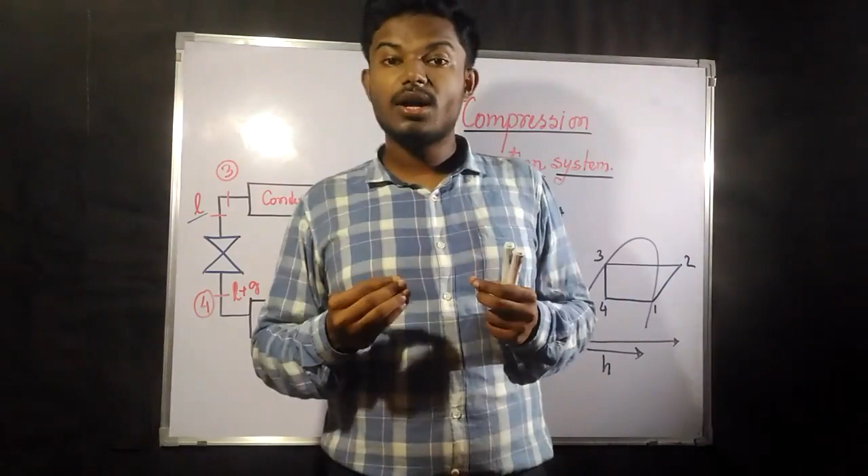Passing through this throttling device, it is going to expand, and due to this expansion its pressure is going to release, and the temperature is also going to come down. So due to this fall in temperature and due to the loss of pressure, we all know that at lower pressure the boiling point comes down.

So due to the loss of pressure, some of the liquid, which was complete liquid, has been converted into gaseous form. So liquid plus gaseous part is going to pass through the evaporator. After passing through the evaporator, the total gaseous part is coming out of the evaporator, and the cycle then continues.

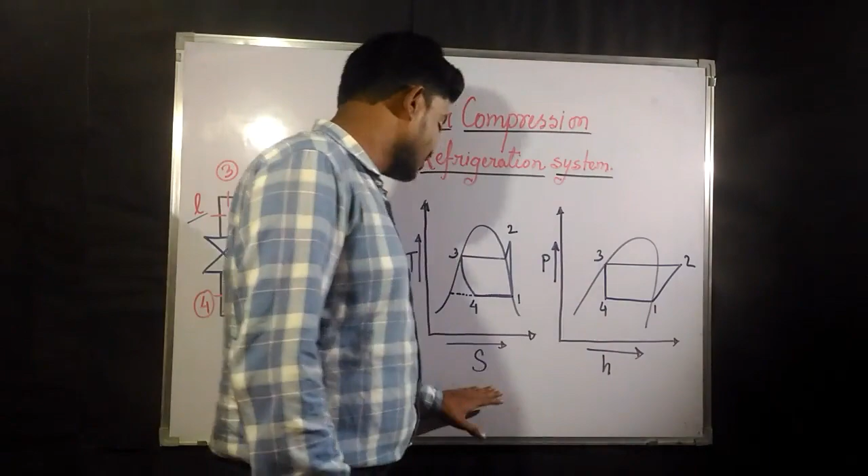Now coming to the TS diagram. Since here there is a phase changing process, again the vapor dome will come into picture. So there is a temperature entropy diagram. In the temperature entropy diagram, 1 to 2 is what?

1 to 2 is nothing but adiabatic compression, or you can say isentropic compression. 2 to 3 is what? At constant pressure it is going to release heat, so you can say this is going to be a constant pressure heat rejection process.

After that, 3 to 4. Now if you remember the open system processes, we derived the work done or heat transfer for open system devices like compressor, turbine, and throttling device. In the throttling device we derived that H1 equals H2, meaning the process passing through the throttling device is an isenthalpic process.

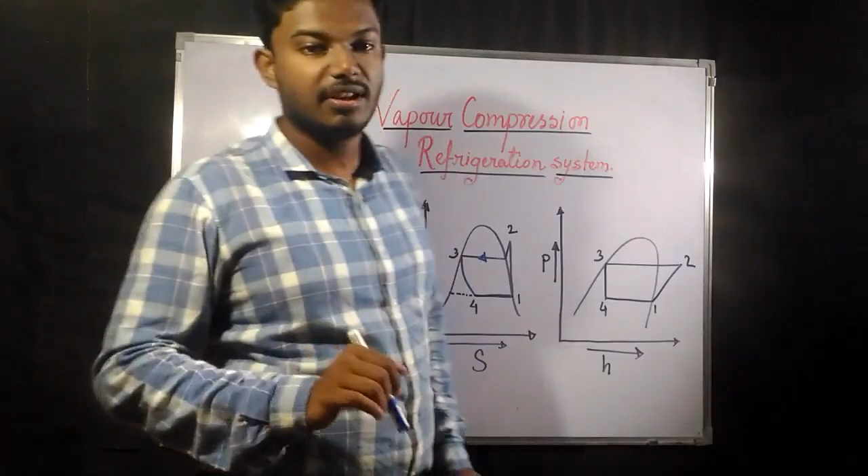Isenthalpic process means the enthalpy is always going to be the same. The enthalpy before passing through the throttling device and after passing through it is going to have the same enthalpy value. So this isenthalpic process is now represented from process 3 to 4.

To help you understand better, we are drawing a PH diagram also, that is pressure versus enthalpy diagram. In that the vapor dome goes like this. Now 3 to 4 is the isenthalpic process, and this is the enthalpy scale. So 3 to 4 represents the isenthalpic process, with whatever enthalpy value is there.

Now 4 to 1 is what? It is nothing but the heat input to the system, but heat rejection from the space where we need to maintain the temperature. So 4 to 1 is a heat input to the system, and 1 to 2 is again going to be compressor work.

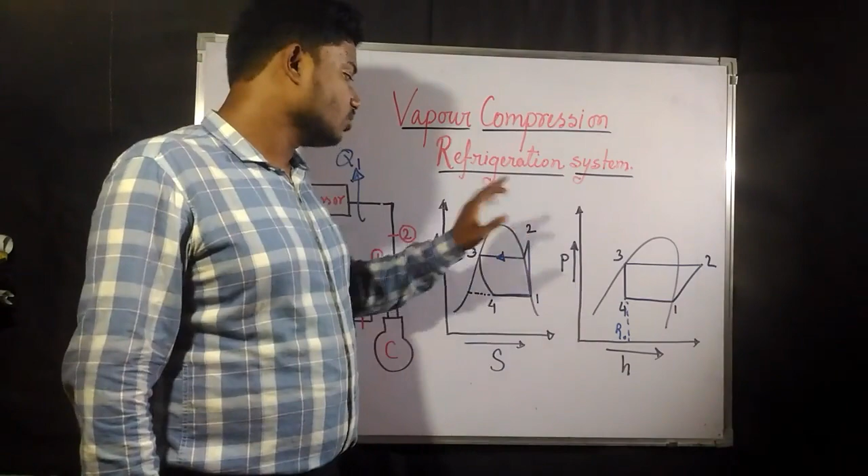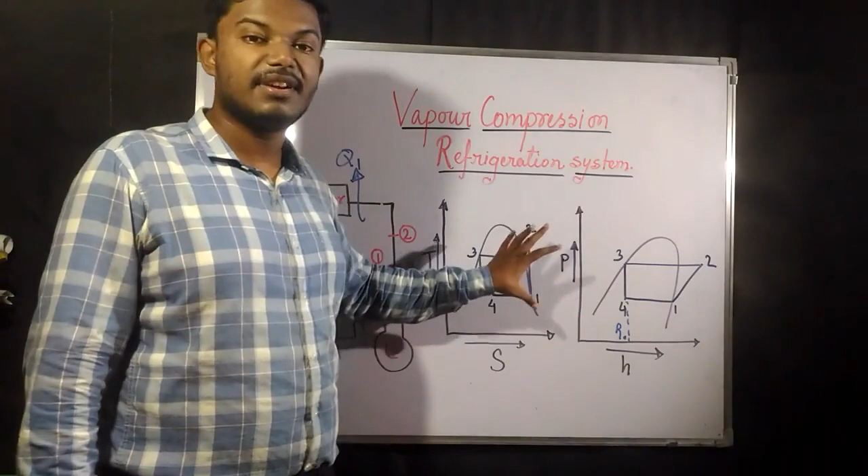Similarly in the PH diagram, or pressure and enthalpy diagram, 4 to 1 is at constant pressure adding heat into the system from the space. So 4 to 1 is our constant pressure heat addition, and 1 to 2 represents isentropic compression, or reversible adiabatic compression. So in the PH diagram, this is how the isentropic process is represented.

So this is the basic layout of a vapor compression refrigeration system. Now we'll see the analysis. After that we are going to start the vapor absorption refrigeration system.